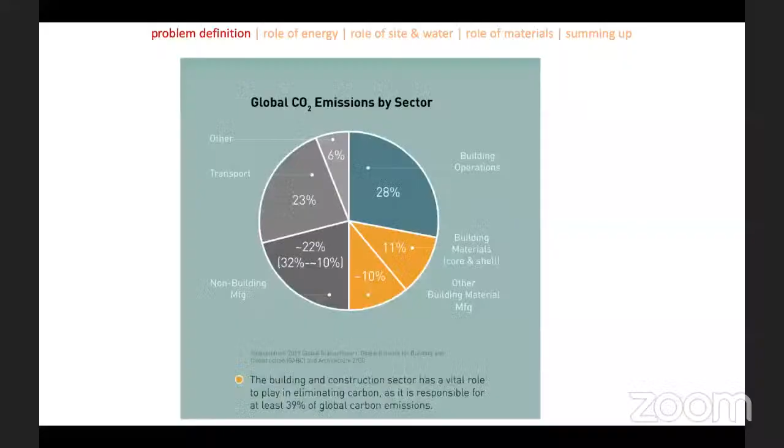Walls, the load-bearing walls, the windows, framing, glazing, and whatnot, plus an additional 10% from the rest of the finishes in the interiors and interior partitions. So all in all, the architecture industry has the opportunity to influence close to 50% of global CO2 emissions. And this is not a small thing. It's a great responsibility and great opportunity.

And if you combine that with the fact that by 2060 we will be doubling the current building stock, between now and 2060 we're going to add one New York City to the planet every 34 days, which is huge. So if you don't apply these climate responsive principles, it would be a big wasted opportunity, and the damage to the environment might be irreversible.

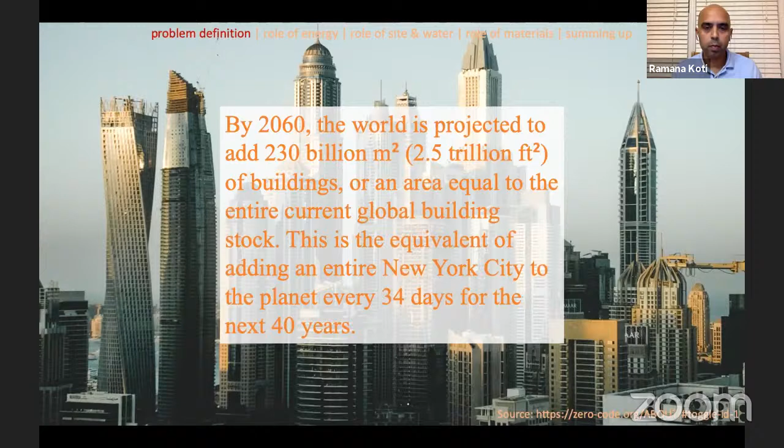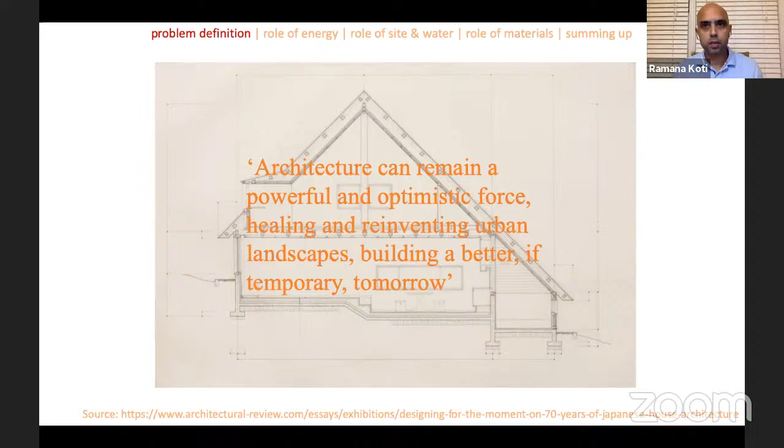Japan, which is regularly subject to earthquakes, extreme weather events, wars and whatnot, has already used architecture as a powerful force for healing and reinventing urban landscapes and building a better tomorrow. So there's something we can learn from what Japan is already doing.

Architecture is important, but it's one of many things. Design goes along with policy and culture, so any change has to address these three issues. Within design, there's efficiency, resilience, and this new term called decarbonization—eliminating the role of greenhouse gases completely from the built environment. We have to do a few things in the short term and a few things in the long term, to address resilience but also build a long-term strategy to avoid emission impacts.

So to sum it all up, in terms of the problem definition, if you take these three parameters—human activity, climate change, and the built environment—all three are related to each other. And the way we live today and practice architecture in general, this relationship is mostly broken, if not completely. The good news is we can do something to fix it, and architecture has a big role to play in fixing it.

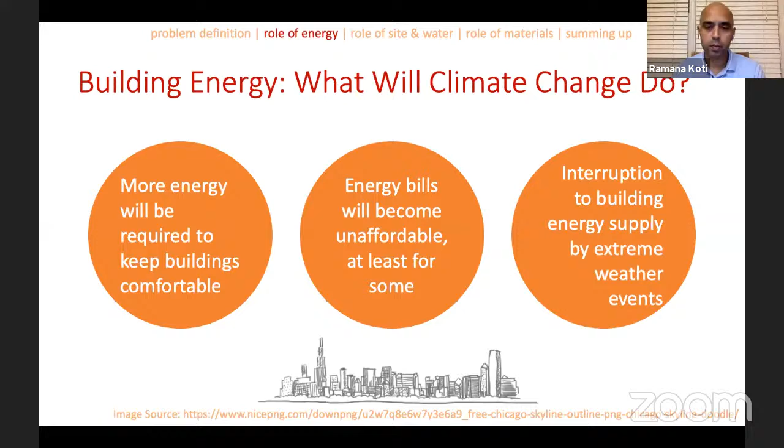So how can buildings respond? Whether the climate is changing or not, I think intelligent use of resources prescribes these three steps in order. First, you maximize passive strategies, as Mr. Vice Chancellor has already alluded to. You focus on the orientation, the passive solar aspect, how the sun comes in or is blocked, how you use daylighting and natural ventilation.

Once you've exhausted all the passive strategies, you employ energy efficient technologies to treat the building—insulating the building envelope, using all LED lighting, or using high efficiency heat pumps, or even ground source heat pumps. So after passive strategies, it's energy efficient technologies, and whatever load remains after the two, you can meet with on-site photovoltaics or solar hot water, and off-site renewable energy.

If you can't meet all of the remaining requirements through renewable energy, you can do whatever you can to reduce the fossil fuel consumption of the buildings. There's a mention of off-site renewable energy here, because in dense urban settings, buildings may not have the site area or roof area to put solar panels on. So while a building's energy consumption might be high, its ability to generate its own energy is not so good in dense urban settings, and buildings might be shadowed by neighboring buildings. So you can always get your energy from off-site renewable sources. There are ways of doing this that would probably take a session on its own, but it's becoming increasingly important.

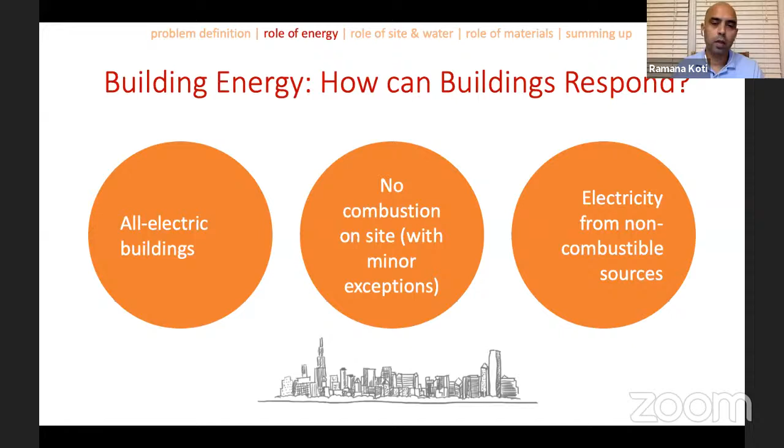This trend has started more recently, and it applies to Western countries more than India. Increasingly there's talk of all-electric buildings, because if you have combustion in buildings, you have emissions. You cannot completely avoid combustion, but you can mostly convert buildings to all-electric. Once a building becomes all-electric, it's easy to supply its electricity from on-site renewable energy, or if the utility plant converts to entirely solar and battery based, then all the emissions from your buildings are eliminated. I know especially in India there's a lot of dependence on cooking with natural gas or compressed natural gas, and certain other fuel types, but this is the new trend.

Beyond all-electric buildings, I'd like to draw on this resource to look at different strategies for how buildings can respond to a changing climate. This book is called Project Drawdown, written by an environmentalist named Paul Hawken.

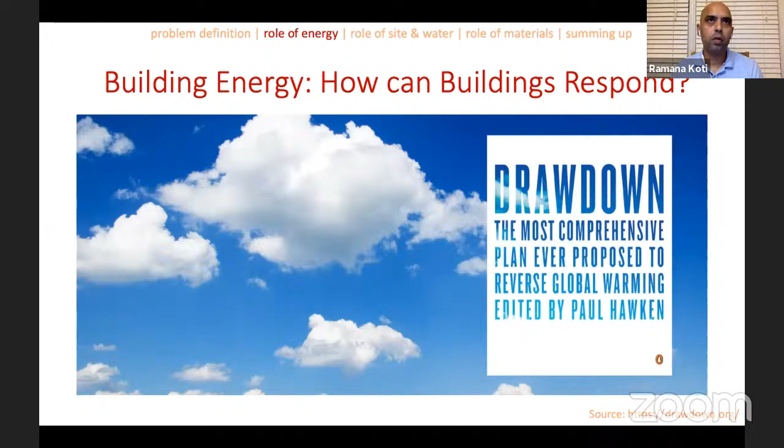What he argues is that we are already experiencing climate change, and terms like fighting climate change or combating climate change are not the right terms or right approaches to use, because it's already here. So he calls for a drawdown, which is a complete scaling down of how we do things to bring the climate back in order.

Let's look at what kind of strategies he advocates in terms of building energy. Please apply this information to your own context—it may or may not be suitable to all places in the world. Net zero buildings is one of the strategies. Net zero buildings means that, on an annual basis, they produce as much energy as they consume, at the very least. So net zero energy may or may not necessarily mean net zero carbon—there are subtleties in there. Please study the differences.

The next thing I'd like to focus on is alternative refrigerants. Most refrigerants used in air conditioning these days are fluorinated refrigerants—HCFC, HFC. All of them are potent greenhouse gases, and they tend to leak from air conditioning systems and refrigerators. So there are two aspects to the refrigerant issue: one, reduce the leakage, and two, use non-fluorinated refrigerants so that even whatever leakage happens doesn't impact the climate too badly.

District heating—this concept has existed for a long time, especially on university and college campuses, where there's a centralized plant that produces heating and cooling, or chilled water, hot water, or steam for all the buildings on campus. It's much more efficient in terms of energy usage compared to each building having its own HVAC system. But it doesn't have to be limited to university campuses—even housing complexes or other community-based situations can utilize district heating or cooling.

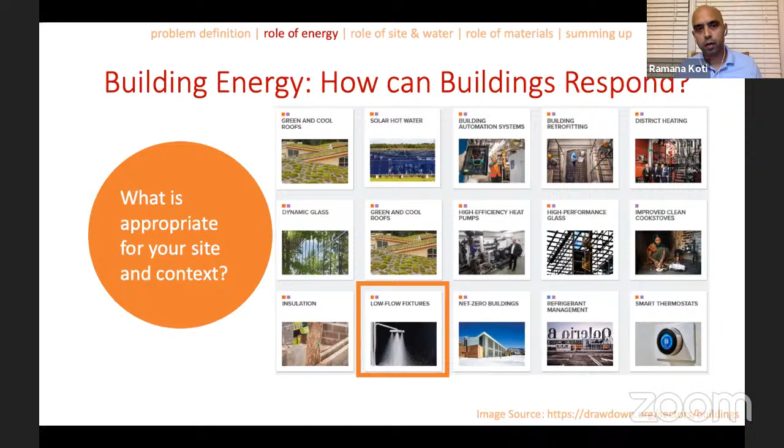I would like to break here before moving on from energy to water, to see if there are any questions.

Hema, can you hear me? Yeah, Ramana, yes, I have a question actually.

The way the whole presentation has been till now, you've touched upon so many points about architectural intervention. So do you have a stepwise blueprint of actually taking any building through this process, like a strategy for how you should check the whole building, something like that?

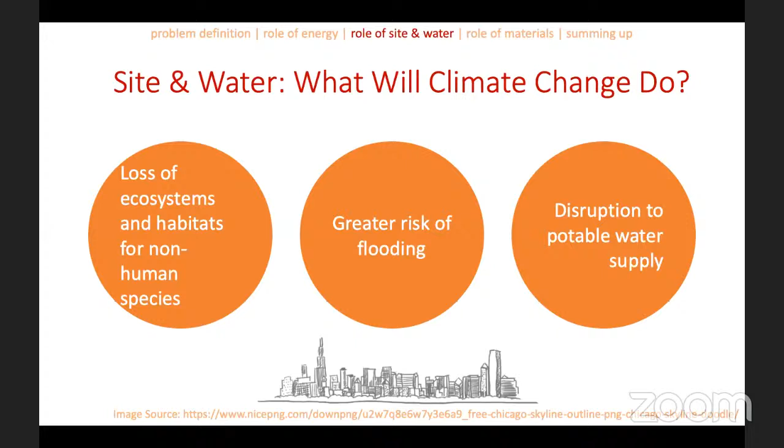So what will climate change do to the site and water situation of buildings? It causes loss of ecosystems and habitats for non-human species because of extreme weather not being conducive to big forests, or man-made deforestation. And because of sea level rise and increased extreme weather events, there's a greater risk of flooding to buildings and sites. All these events can cause disruption of potable water supply to buildings, which our buildings depend on for drinking and a plethora of other end uses.

So how can buildings respond to this possibility? Basically you design - Professor Mohan will touch on this tomorrow in greater detail - but in a nutshell, the idea is to design the landscaping around the building just like you would in a pre-development situation. Bring it back to the natural situation as much as you can, so that you're creating new ecosystems or restoring old ones and creating habitats for non-human life forms.

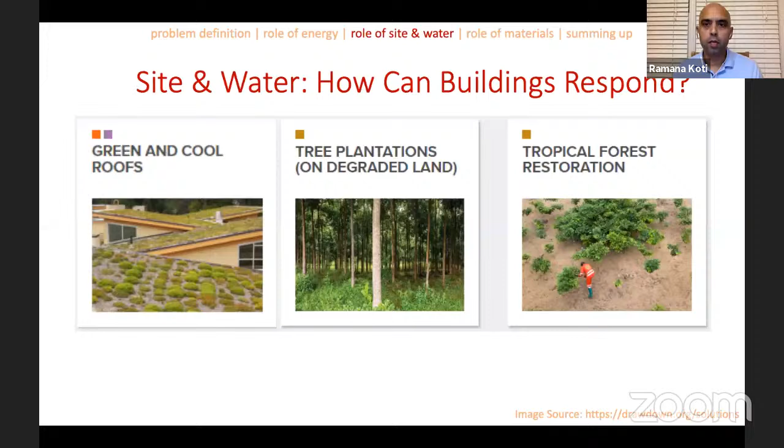And talking about flooding, there are emerging ways of dealing with it, especially for buildings in high risk flooding areas. One is wet flood proofing, where you deliberately create a non-living space at the highest risk area at the bottom, designed so flood waters can pass through the building without affecting it negatively. Dry flood proofing, on the other hand, completely sheds water - it does not let water enter risky areas of the site or building through waterproofing or other design strategies.

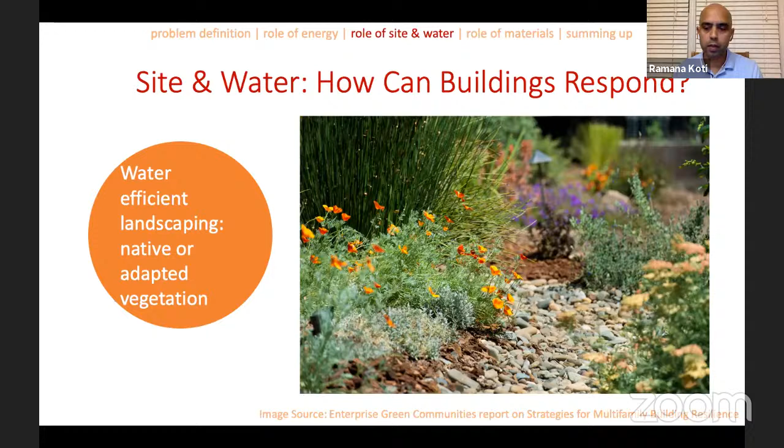Water efficient landscaping means designing your landscaping around the building with native or adapted vegetation - there's some water requirement during the formation period, but after that they can survive purely on rainfall in the region. Water efficient plumbing fixtures, in the US called WaterSense labeled fixtures, are increasingly consuming less and less water. They still need water to operate, but they've become very efficient.

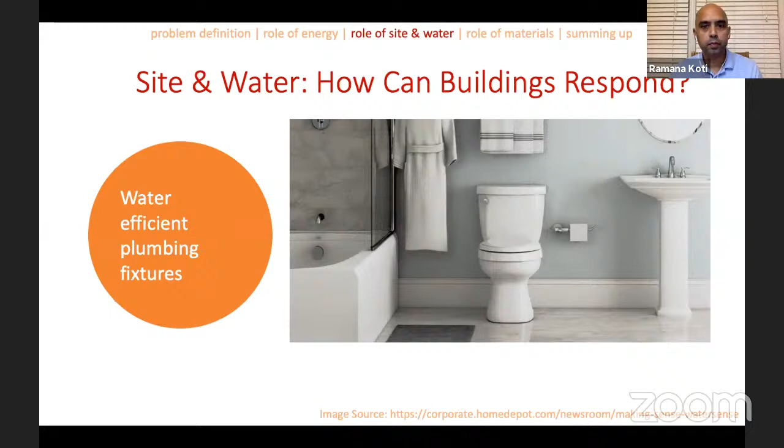Gray water and black water recycling is increasing in prominence, especially as water becomes a scarce resource. Gray water is what comes out of your kitchen sinks, bathroom sinks, and bathtubs, whereas black water is what comes out of your toilets. Both can be recycled on-site or off-site and reused in a way that is safe and healthy.

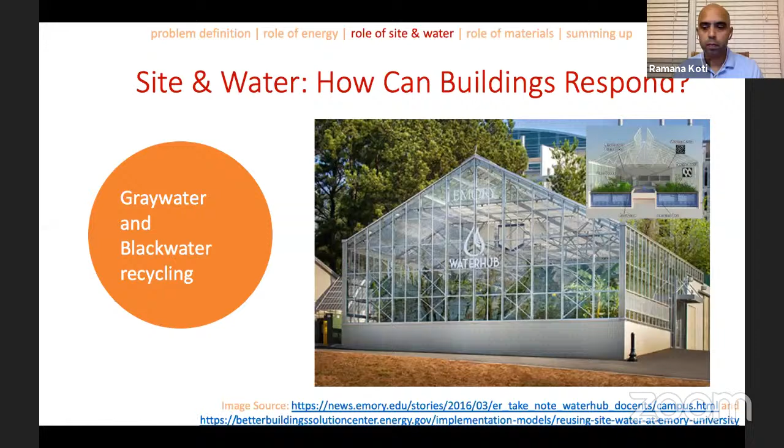Trying to sum up what we discussed so far: if a building's water flow gets interrupted because of an extreme weather event or a breakdown, so your municipal connection gets severed - what we've designed on one project is a day tank, which can hold up to 3 to 5 days of water. This concept is very prevalent in India, but in the US it's somewhat uncommon because the supply of water has not been at risk - the supply is so continuous.

So let's say there's an optional rainwater harvesting connection that goes into the day tank. If the water flow gets interrupted, you can use the water already stored in the day tank to flush your toilets or use very efficient fixtures, and survive until the water connection comes back.

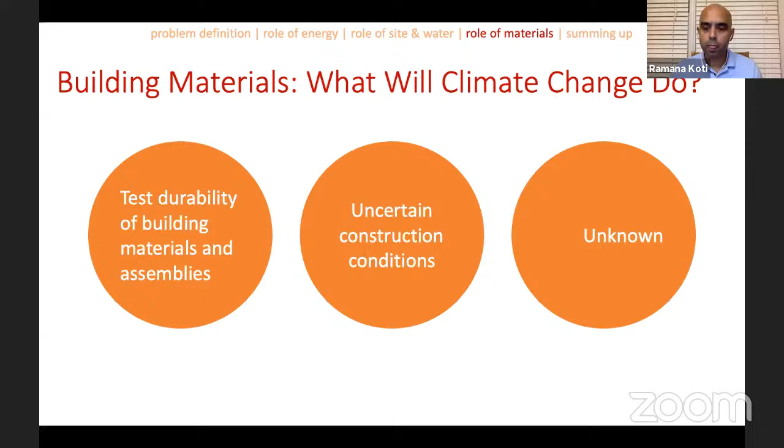So how can architecture and building materials respond to this changing climate? Somebody already asked about embodied energy and carbon - I'm glad you're already looking into it. Basically, the building materials used in a building have an energy and carbon footprint. If you put a time value on emissions, they become more important than energy and carbon from building operations, because you're trying to limit emissions in the next 10 years, going from 1 degree Celsius warming to 1.5. Material-related emissions are upfront, whereas operational emissions happen over the next 50-60 years.

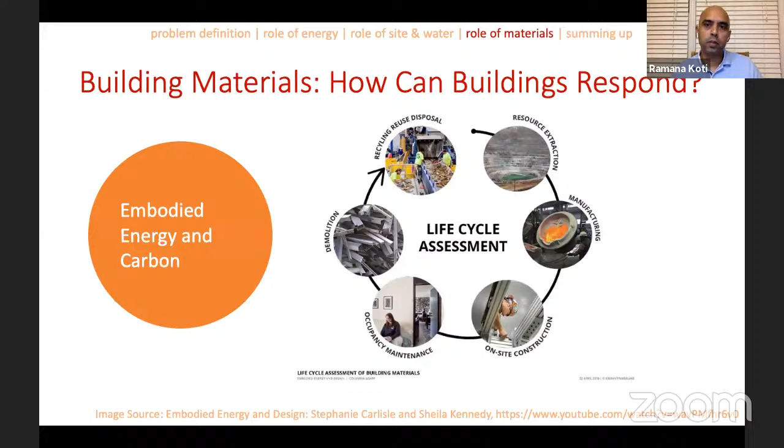That's why how buildings and materials are manufactured, and how clean their energy sources are, becomes very critical. If you look at the diagram on the right, there are several stages in the life cycle of a building material - starting with resource extraction, manufacturing, on-site construction, maintenance, demolition, and eventually how demolished materials might be recycled, reused, or disposed of. Usually it's not a closed loop, because we're not recycling construction or demolition waste enough to put it back in the loop. We're still extracting virgin resources, and it has to become a closed circle for things to be sustainable.

One of the biggest opportunities is adaptive reuse of existing buildings. It may not be the same building type, depending on what a client wants, but you can convert a dormitory building into a classroom building, or a classroom building into a dormitory, depending on how the needs on a campus are changing. Many architects feel we should stop building new buildings and instead renovate existing ones to meet future space needs.

Designing for durability matters too. If a building lasts 100 years instead of 50, you automatically reduce the need for a new building and the emissions that would have caused, given its demand for new materials.

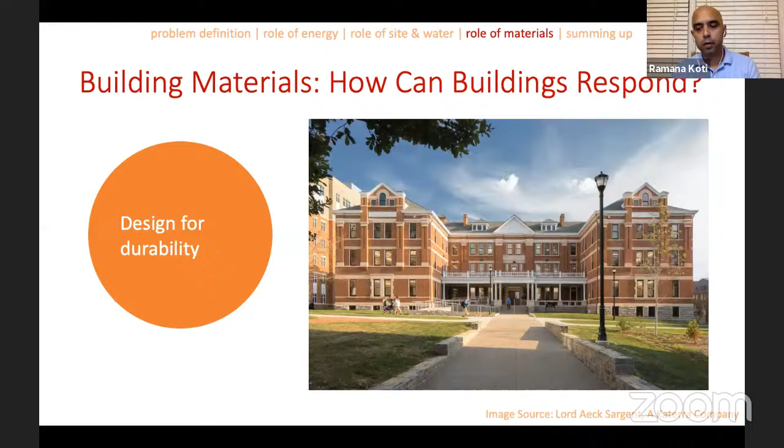If you understand what materials are readily available locally in your region and specify them regularly on your projects, there are fewer emissions related to transporting materials from where they're extracted and manufactured to the project site.

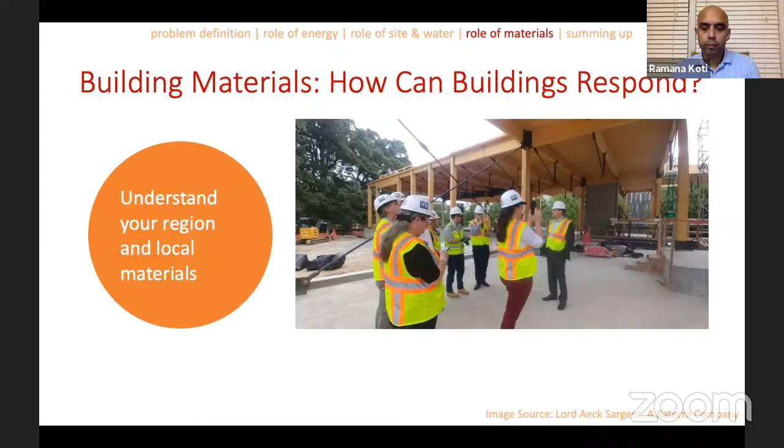Specifying materials with a low carbon footprint is important. Some materials are rapidly renewable or take much less energy to manufacture than others. Keep an eye on specifying materials that naturally have a lower carbon footprint—or that originally had a high footprint, but whose manufacturer has converted to renewable energy for their plant, making it effectively low carbon. Specifying those regularly helps.

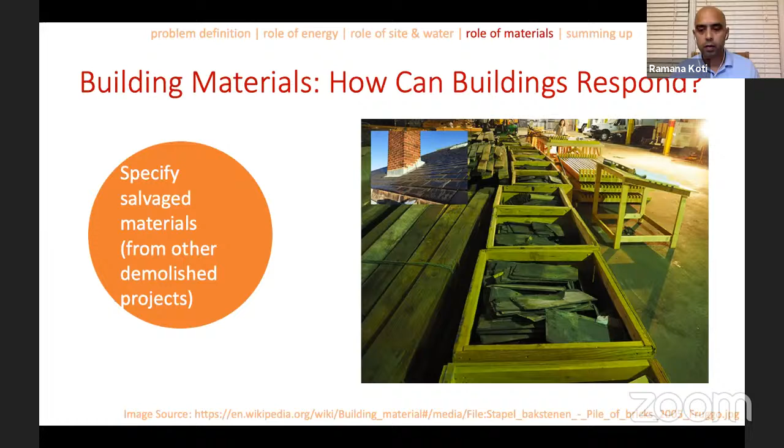There's a process called lifecycle assessment, which looks at the different stages of a building product. There's the product stage, called cradle to gate, covering extraction, transportation, and manufacturing. Then the construction process also has its own energy and carbon footprint, which can be optimized.

Then there's the use stage, where the building has been constructed and is being maintained, and each piece of equipment in the building has its own lifespan. For example, light fixtures might last 10 years, and air conditioning might last 15 to 20 years. If the building itself lasts 100 years, you're regularly replacing those systems inside it.

And at the end of life, what happens? We talked about demolition, recycling, or reuse. You can use this process of lifecycle assessment to optimize the embodied carbon footprint of your entire project.

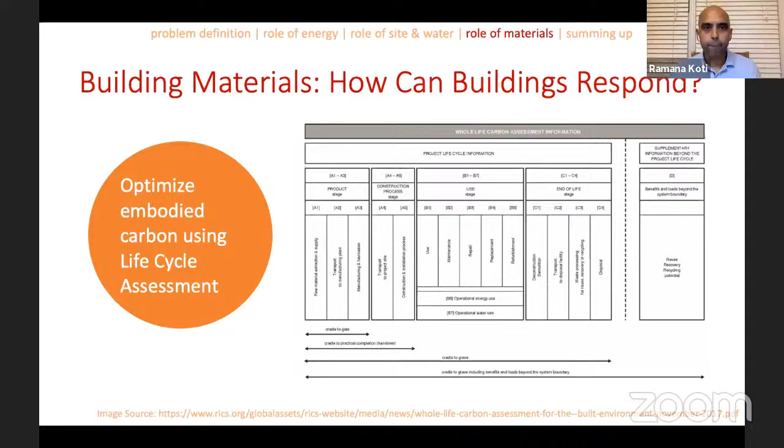Summing up what we've discussed about materials so far: product selection is involved regardless of whether you're building new or reusing an existing building, and the goal is to optimize embodied carbon.

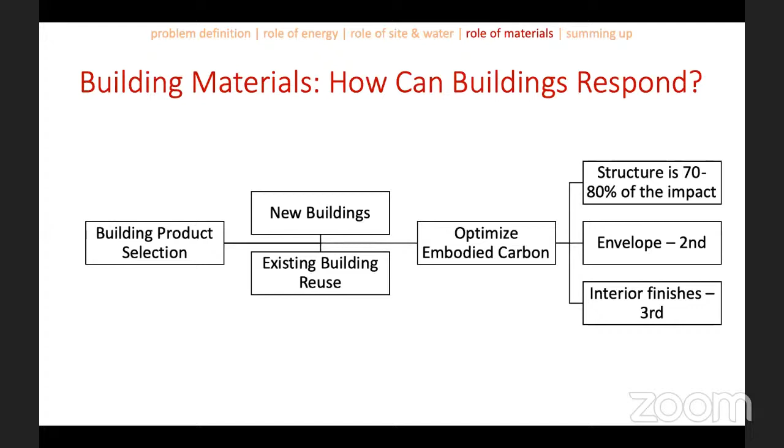When optimizing embodied carbon, if you can only do one thing given the fee and time available, focus on the structure of the building, because the structure accounts for 70 to 80% of the carbon footprint of the entire project. If you can, then move on to the envelope—load-bearing walls, external walls, window framing and glazing. Someone asked a question about glazing. Interior finishes and partitions have only a 20% to 30% impact, so if you focus on the structure, you'll get more bang for your buck compared to everything else.

All right. The next section is summing up, but I want to pause here to see if there are any questions.

There's a question by Ms. Harini. She's saying that glazing and concrete has become inevitable in high-rise construction. Can you suggest vernacular and traditional building materials, particularly for high-rise development in the Indian context, and how far is it workable? I think the case study I'm going to cover next touches on that, but it's not in an Indian context. Please take that information and see if it's translatable to India, or if there's comparable information available for the Indian context.

There's another question by Ms. Shobha, asking for old buildings, how far is it possible to retain and use natural sustainable strategies for reusing the existing material. So it's about reusing old buildings that may or may not be in good condition. Is that the question? I'm not very sure. Shobha, are you here? You can unmute and ask the question. Hello, yes ma'am, good morning ma'am. Yes, you can ask your question.

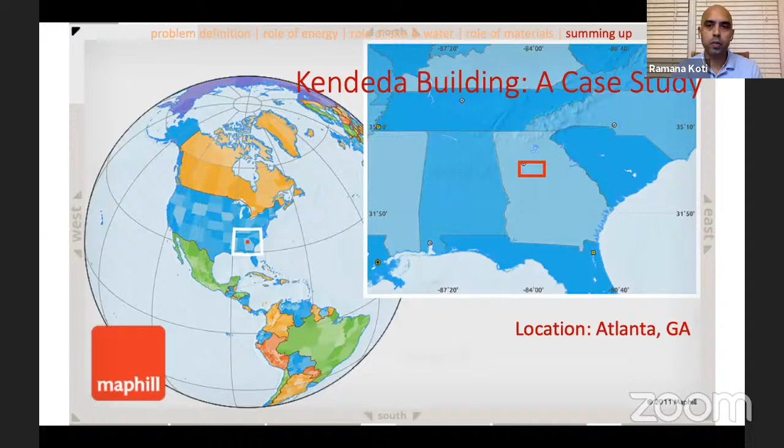So what it does is it uses a certification system called Living Building Challenge. Living Building Challenge is a philosophy. It's a certification system, it's an advocacy tool. But if you take LEED or EDGE and make it 100 times more stringent or rigorous, you will get Living Building Challenge. It has 7.

It follows the model of a flower, because a flower is so self-reliant. And the 7 categories in the certification system are called petals: place, water, energy, health and happiness, materials, equity, and beauty.

In certification systems like LEED and EDGE, you have some things you have to do, and some things that are optional, and you get points for doing the optional things. The greater the number of points you earn, the higher your certification level is, like silver, gold, or platinum. But here, you have to do everything. Nothing is optional. Under the 7 petals combined, there are 20 imperatives. These imperatives are comparable to credits under LEED, and you have to achieve all of them.

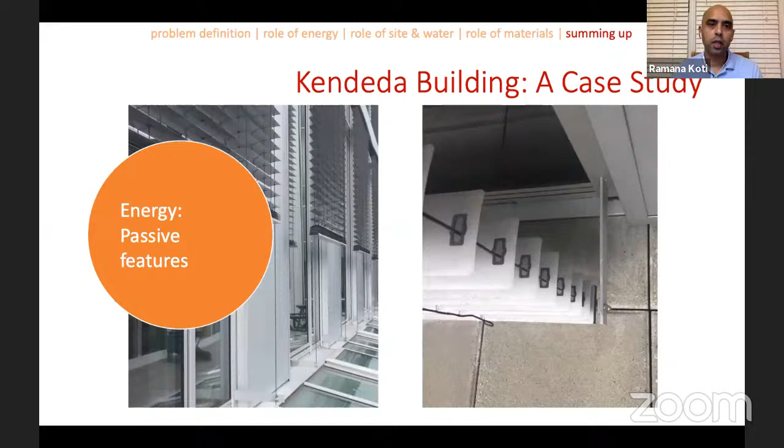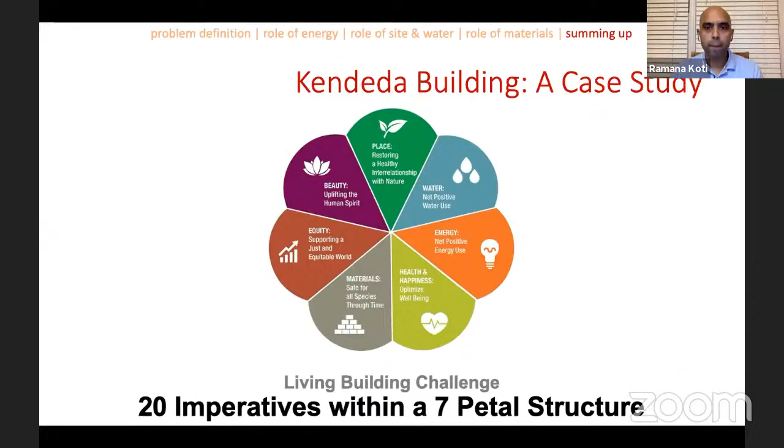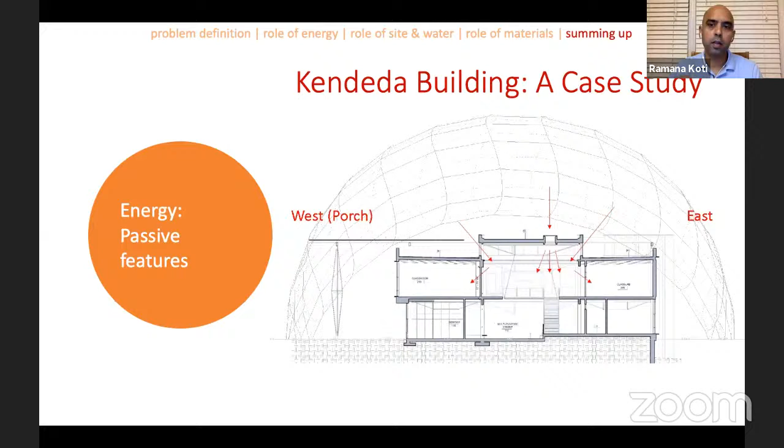On top of the east and west treatments, there are skylights and clerestory windows in the middle, which bring in daylight. I believe there are about 70 ceiling fans in the entire building, and they redistribute the air conditioning and decrease the need for it in a way. They provide passive comfort, which helps reduce the load when power is available. But if there's a loss of power and the air conditioning doesn't perform, the fans by themselves, in combination with the shading and operable windows, can provide comfort.

This was a very initial energy analysis conducted on the project, done even when we were interviewing for it, before we'd won the project. The leftmost bar is the baseline of all existing comparable buildings. The energy use intensity, measured in kilobTUs per square foot per year, of all existing comparable building stock was 83.

If you designed a new building that barely met the energy code of the region, your energy use intensity would be 51. But what if, on top of barely meeting the energy code, you used a radiant heating and cooling system, where hot and cold water pipes run through the floor slabs, connected to a ground source heat pump? Your energy use intensity comes down to 19.4.

For those unfamiliar with energy use intensity, it's somewhat comparable to miles per gallon in a car—it tells you how efficient the building is. Instead of a radiant system, if you used a variable air volume system with low pressure drop, connected to the campus central plant instead of a local heat pump, your EUI stays in the same range of 20. Adding photovoltaics that generate 10% more power than needed would put your EUI at 22.4. There are other measures studied too, but you can see what could have been 83 is now at 20—roughly a 75% reduction.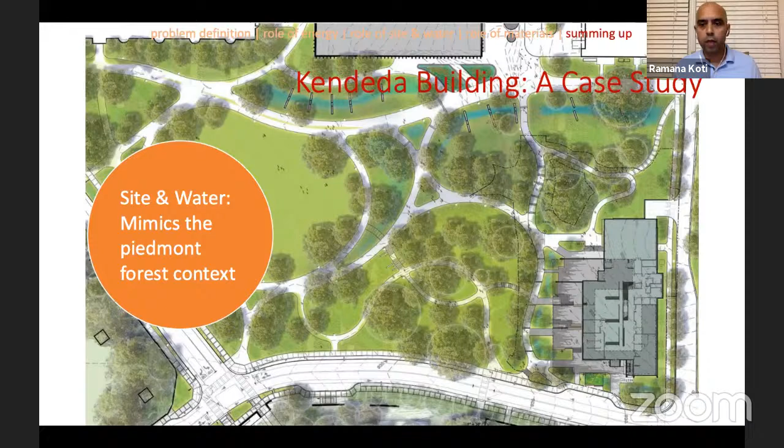There are three scenarios for what happens to water when it rains. In the pre-development period, with no buildings, most water would infiltrate into the ground, with some surface discharge flowing to adjacent regions. But today, the way we design buildings, most water goes into storm drains and the city sewage system, with very little infiltrating naturally as it did in the pre-development scenario.

In a living building, the way we designed this one—which, by the way, has been operational for slightly more than a year now—it's designed to mimic the pre-development situation, where most water gets infiltrated, some is discharged on the surface, but a lot of it is used to create a net positive water consumption situation, as shown in the diagram.

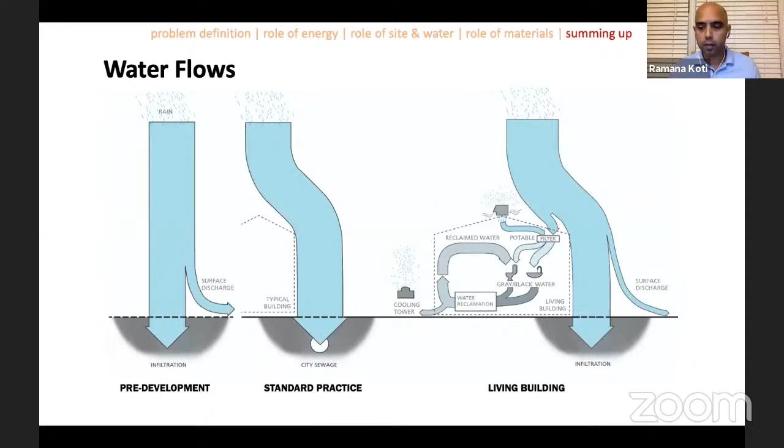And this is another view, plan view of the site that shows the different kinds of water flow on the site and the different kinds of pavement systems that exist. There are other diagrams that explain this better, so I'm going to move from here.

And if you cut a section, for example, the porch area, this pervious unit pavers with the stone base let the water infiltrate and not flow away like a typical concrete surface. And between that and the walkway, there's all these.

One of the requirements of Living Building Challenge is a certain percentage of your site has to be for urban agriculture, and you have to produce food for human or non-human consumption. So these food types were identified as being native and useful to the local life forms, and they were interspersed between pervious concrete and unit pavers and whatnot, and integrated into the landscape of the project.

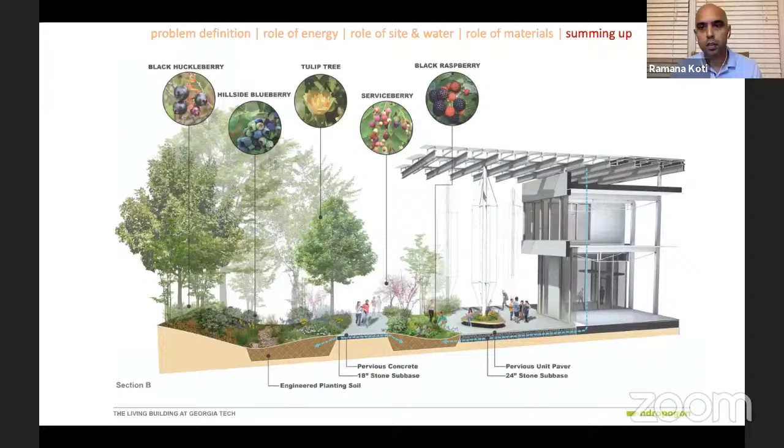So here's another diagram showing different water systems on the site. There's a lot of detail. Don't try to read all of it.

But this gray water treatment we talked about, which comes from sinks and bathtubs and whatnot. And there's rainwater to potable water. Remember, even the drinking water comes from rainwater on this project. And this condensate harvesting—air conditioning systems, when they remove moisture out of the air to cool it, that water condenses, and it's a very pure form of water, which still requires a little bit of treatment, but you can create water through recovering condensate on the project.

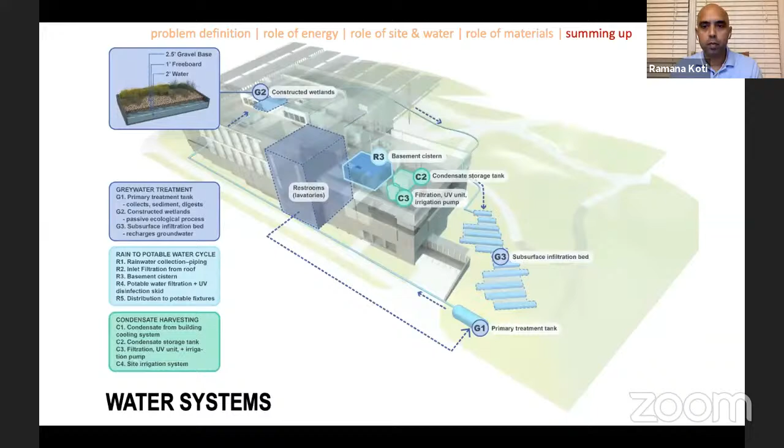And here's another diagram that shows different types of surfaces. On the top left, you will see a green roof surface, and to the top right, you will see the solar panels, which not only double as surfaces capturing rainwater and funneling them down into the building or on site. And the blue areas on the site are porous unit pavement, like we talked about at the porch. And at the walkways, the gray areas are the porous concrete pavement.

And another level of diagram shows what's happening with the water on site. All the blue boxes that you see on site is where the water is stored, either to reuse or to infiltrate—I mean, slow down the flow of rainwater from the site. It's stored here.

Pardon me? Okay, and did somebody say something? No, I think you can continue.

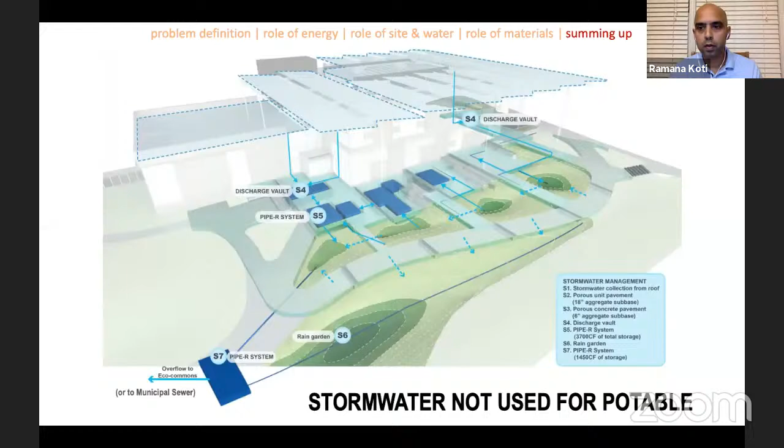Okay, so you store it and gradually release it on the site to improve infiltration, as opposed to all the water flowing away from the site. And all the green areas are the landscaping or bioswales or natural rain garden systems that will actually hold the water and infiltrate it. And we've already talked about the porous pavement systems on the site.

So that was site, but what happens inside the building? Let's take a snapshot of one scenario here.

On the right, everything is the same, efficient fixtures, but your toilets are regular toilets that need to be flushed. And on the left, you replace the regular toilets with composting toilets, which use like a tablespoon of water and soap per flush. So the size of the pies is indicative of the amount of water that the project is using. So just for toilet usage, what would have been 800,000 gallons?

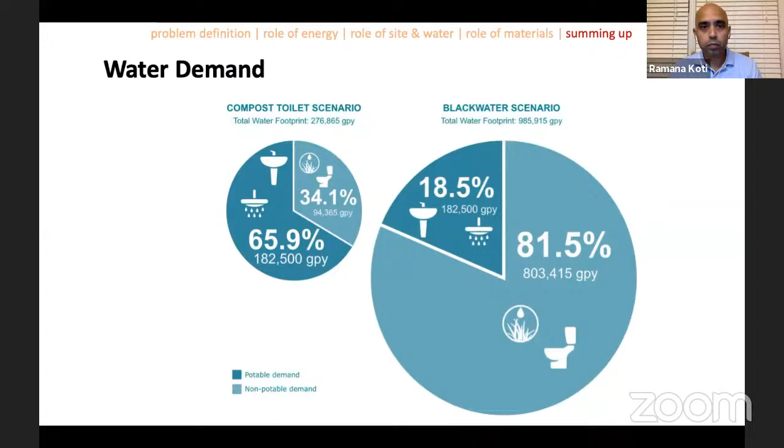1 gallon is roughly 4 liters. So what would have been 8 lakh gallons has been reduced to less than 1 lakh gallons for toilet usage. And this is also a money saver, over the life of the project, because you're not using all that water.

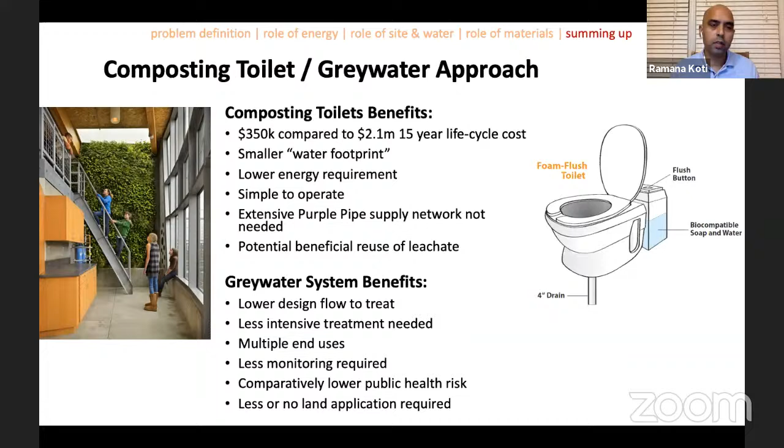And there's, like we discussed earlier, gray water treatment on site using natural systems. And the treated, captured condensate and the treated gray water are reused for irrigation and whatnot, and there's no flushing on the project. But the drinking water mainly comes from the treated rainwater. There's about a 50,000 gallon room in the basement, which is a cistern that holds all the rainwater, which gets treated and circulated for drinking water purposes.

I think I missed a slide here. Maybe it's better to skip it at this point. But we've talked about energy and water.

Moving on to materials. There's about 20 or so red listed materials that are to be avoided completely on a living building. For example, formaldehyde is one of them, and PVC. No PVC piping or any material or product using PVC on the project at all. So those 20 chemicals, if you take all their variations into account, become 700-some chemicals.

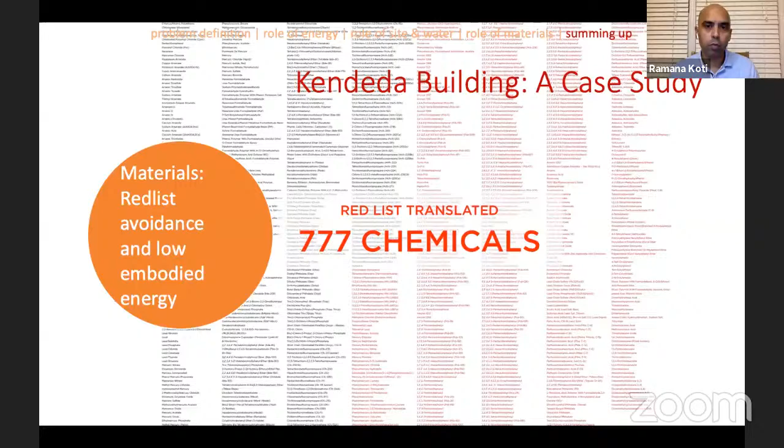And we went through a detailed process to make sure we researched all the products available in the market. Either you avoid the chemical, or if you're forced to use it because there's no alternative available, you have to do advocacy, writing letters to the manufacturers, urging them to remove those chemicals from their products. And for the structural system, like we talked about, structure is about 70 to 80% of the carbon impact on the project.

If you apply carbon footprint analysis to different structural systems, concrete had the highest carbon footprint, followed by steel, the second highest. Wood, which is actually used on this project for structural systems, had a negative carbon footprint because it's less intensive to manufacture compared to cement, concrete, and steel. It also acts like a battery for carbon, storing it over the life of the building, so its carbon footprint is actually negative.

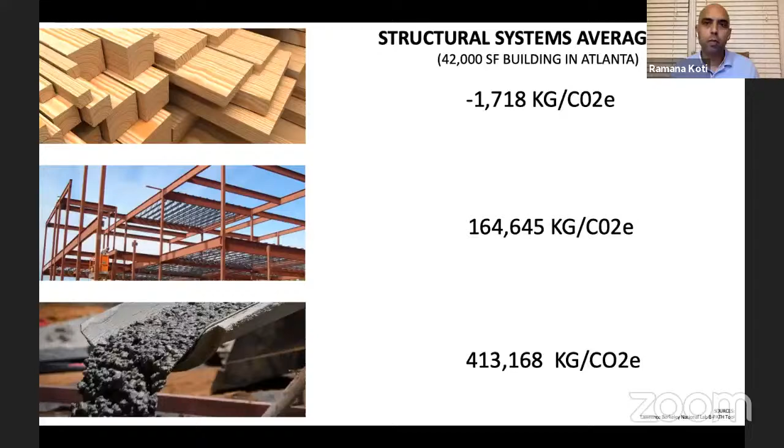So for this reason, timber was the chosen medium of structure for the project.

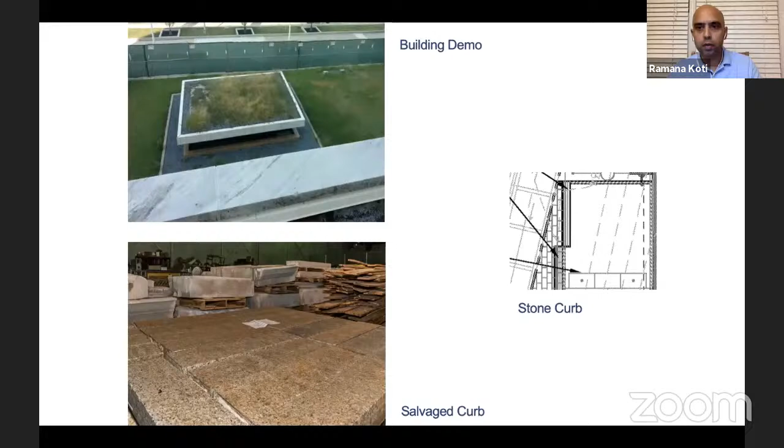On the campus, some trees fell due to storm conditions, and those trees were cut up and converted into countertops for this project.

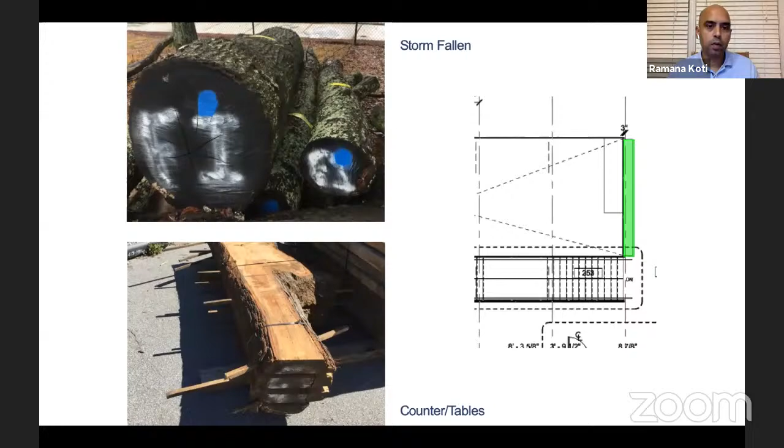On the left, you see that because of tax rebates Georgia offered for the movie industry, Atlanta has become a huge movie shooting hub. All the wood used for temporary structures on movie sets is waste, and we took a lot of it and converted it into ceiling roof decks on the project. You can see some deeper members and some shallow members - the deeper ones are structural, but the shallow members are just fillers, and those shallow members come from the reused joists.

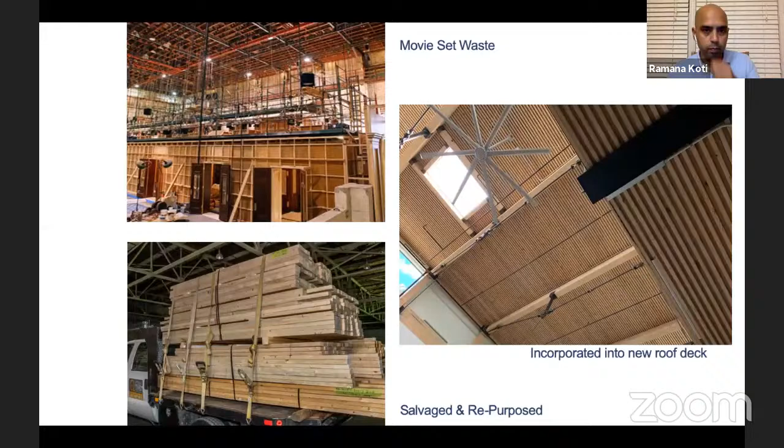Looking at the Living Building Challenge, you have to achieve net positive energy, net positive water, and the building has to be located appropriately in its context. But it forces an integrative process - it says okay, you're doing all that for resources, but you also have to make sure the building is healthy. The materials we already talked about, but the building also has to be equitable to all kinds of people, and it has to be beautiful.

So as you design resource efficient buildings, or teach your students to design them, it's good to keep in mind that you have to combine all these aspects and make sure it's a successful architectural example.

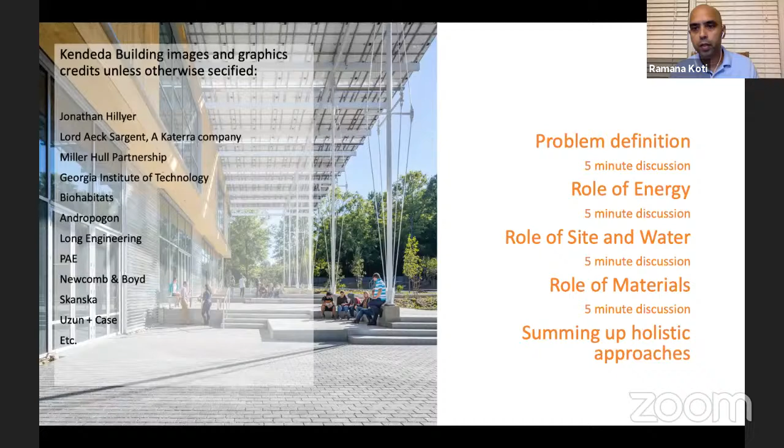Just to quickly recap what we've looked at: problem definition, the role of energy, the role of site and water, the role of materials, and we used a case study to see how all these things come together.

And that's all I had for today. So if you have time for a final Q&A, Hema, I'm open to questions.

Yes, if anyone has any questions, please type in the chat. I saw some questions pop up while I was talking - I don't know if people already typed something or not. They were not specific questions. Okay, okay.

Well, if there are no questions and if something comes up to your mind, Hema has provided an email address to send questions to, which can be answered at a later date. But I really appreciate the opportunity to discuss such an important topic with you all. Thank you.

Yeah Hema, there is one question by architect Tania Bira: wood has a negative footprint, but where wood is not available in plenty... is there more to the question? Yeah, that's all - she wants to understand why wood was used in this particular building when maybe in our case, in India, wood might not have a negative footprint.

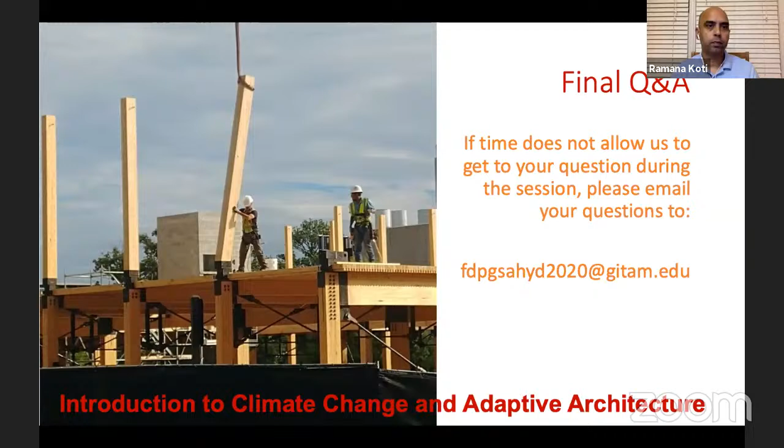I would just like to sum up, Ramana, your work, the presentation that you have done. It was very meticulously done in less than 1.5 hours. You have actually summed up everything about a building as an architect, how we have to look, and the new challenge that you have sorted out in the living building challenge seems more appropriate than LEED and other systems. Whenever we think about LEED and ECBC, we feel they are not being done for a building, but for some commercial gain. Many architects feel these green building systems have commercial end goals rather than an architect actually responding. But this one definitely seems to be a comprehensive and real challenge for an architect.

From net zero, now we are talking about positive net, where buildings are producing more energy than they require, and then they have to be healthy. Now urban forestry is a part of the building itself, where urban farming is part of your building design. All this seems to be a better sustainable solution than the other green building concepts we are working on. This is the first session where you have given a very broad scope for architects to be more attentive, rather than just looking at solutions to problems. Building should not only be a solution to problems, but more than that, which architects should keep in mind while working.

I would like to first give a brief introduction about Dr. Janmejoy Gupta. Dr. Gupta is the head of the department and an associate professor in the School of Planning and Architecture. He is an architect and urban planner who worked for over 15 years in the industry, and was also teaching for a while. He acquired his doctorate in architecture from BIT Mesra, and is presently working on extensive research on passive design strategies for thermal comfort in dwellings and sustainability in urban planning. He's an IGBC professional and has worked on a number of green building documentations. He's an editor for a special issue of the Journal of World Architecture and an editorial board member for several journals, such as the International Journal of Architecture, Arts and Applications, and the International Journal of Sustainable Building Technology. He's also a life member of the Indian Institute of Town Planners and the Indian Institute of Architects. So he's going to give a presentation on vernacular architecture today. We are very happy to have you, sir.

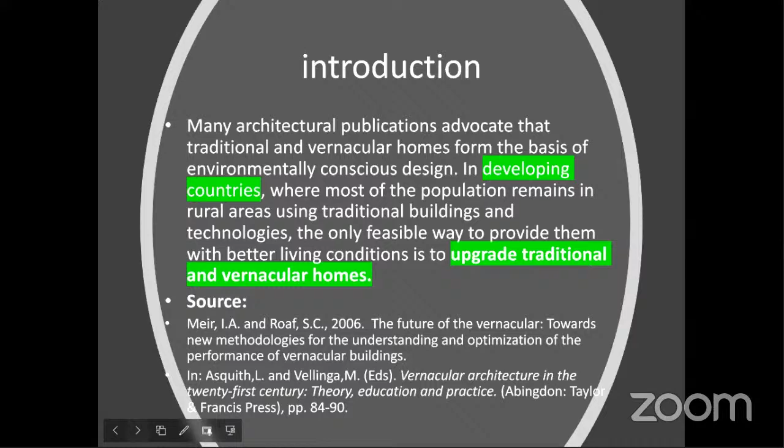Now, of course, most of us would be aware of it, but it still needs to be pointed out that the main determiners of vernacular architecture are climate, yes climate of course number one. Number two is the locally available building materials. Now this is something we are grossly neglecting in present day. I still feel our first choice as architects, even when we are doing live projects, is that we should source the locally available materials. Why?

Even our GRIHA ratings, even our IGBC green ratings, they have this, that you source your materials locally. They have some points for indigenously sourced materials and all those things. So I think that's somewhere we are going wrong on. Third is our indigenous construction techniques. Again, India is very rich in indigenous construction techniques, which can be reinterpreted, which can be re-evolved into modernized techniques, modern ways, and used. But somehow we are missing out.

And of course, fourth, all these four are equally neglected actually in present day Indian scenario, most of the cases I'm talking about, where our local customs and social traditions are neglected. We are not looking into them, we are not giving importance to them. And you know what happens if we neglect the cultural practices of those people, the future generations lose touch with their roots, and that is detrimental to society.

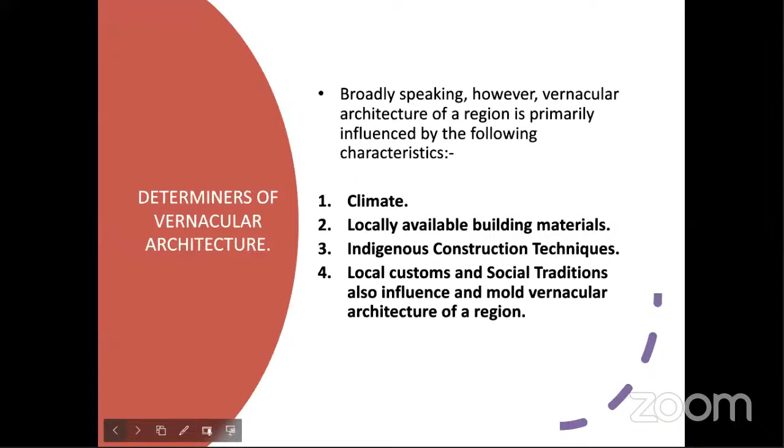Now, vernacular buildings are inherently a sustainable way of life. They inherently promote a sustainable way of life. They are what sustainability is all about. So vernacular buildings are synonymous with sustainability, if we may even say that.

Because all documentations of vernacular buildings through history have shown that these buildings record lifestyles of the past, what people did and how they lived. And as I told you at the beginning, climate change is not something happening only today. It has happened before, with major implications, maybe equally major as today. So then also people found a way to survive and not perish. Therein lies the importance of vernacular architecture. There are a lot of ecological lessons we can learn from vernacular architecture of that time.

Now, many of you must be aware of the famous publication House, Form and Culture by Amos Rapoport, an exceptionally good book on this subject. He has clearly mentioned, after extensive studies, that in vernacular housing, climate and culture are the two most important determinants. Materials, construction and technology are there, but they are at best treated as modifying factors, add-ons. The crux, the heart of vernacular architecture, lies in climate and culture. It is climate and culture that decides vernacular architecture, and that has molded it all through.

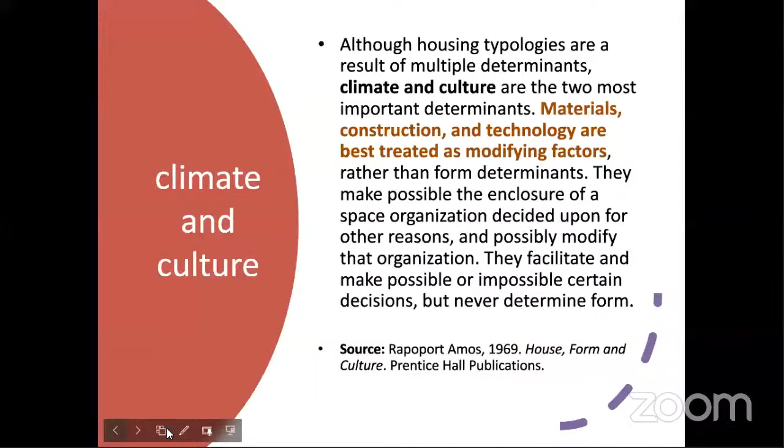Now, the first job we have as an architect is to recognize vernacular values - first, what to take from vernacular architecture and what not to take. We can't blindly go back 50, 100, 200 years. It can't be done in today's high-tech world of intelligent buildings. But there are some things which we need to take. So the first thing is the need for recognizing vernacular values.

Now, some things that vernacular architecture does very well is orientation of buildings. Of course, we also know it, but unfortunately, even after knowing, I can show you dozens of examples in real life architecture where buildings are not even oriented properly. I know there are other factors where architects are not free to orient their building as they wish in many cases, but still, that's the job of an architect, to find the best fit solution. And sometimes we are guilty of not doing that.

Internal arrangement of spaces in a lot of vernacular housing all around the world is exceptional. The use of courtyards is something we need to learn from vernacular architecture - where to use internal courtyards, for example in hot, dry climates, and where to use external courtyards, maybe in climates which are a bit windy and hot but warm and humid, with an appreciable evening breeze. We need to orient those courtyards in the appropriate direction.

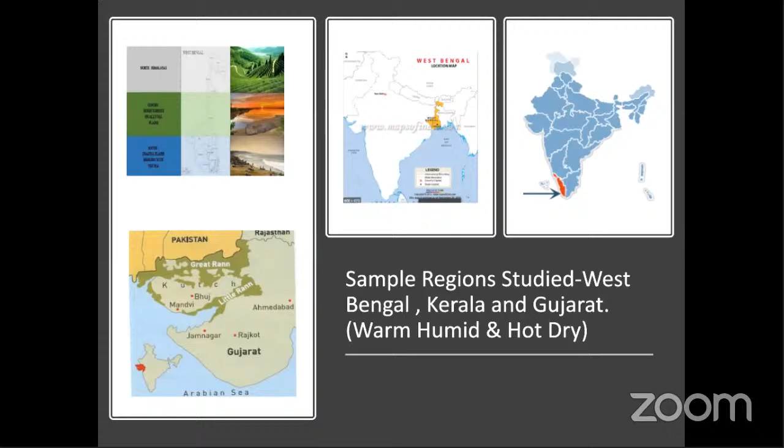This is something I had worked on in one of my research papers, trying to find contextuality in vernacular. The main reason vernacular architecture is being shunned or ignored nowadays is that many people don't find it contextual or at par with their economic status. Even if low income people are earning a lot, they don't feel comfortable or prestigious enough, status-wise, to live in vernacular houses. So we need to find contextuality in vernacular, and for that I made a basic matrix for one of my papers. I am showing you excerpts of that.

First is, of course, climate responsiveness. In order to evaluate any vernacular architecture of any place, be it India or abroad, we need to understand how suited it is to climate. If it's not suited to climate, it's useless to have that vernacular architecture - we can try other solutions.

Number two is aesthetics. Of course aesthetics matters, and a lot of vernacular architecture is studied just because it's so attractive. There are a whole lot of documentations and books written out of the earthly beauty of vernacular architecture.

Third is building materials. We somehow have a misconception that vernacular material is only mud and bamboo. It's of course not, as the previous presenter so nicely put it. Even timber is a big thing, granite too - that's vernacular as well. Anything available in your region, any type of locally available stone, is a vernacular stone. You can find places in Rajasthan and even in the South where certain specific types of stones are available in abundance. If you're using that stone, you're contributing to environmental consciousness, to the greenness of your building, and retaining the local character of that area.

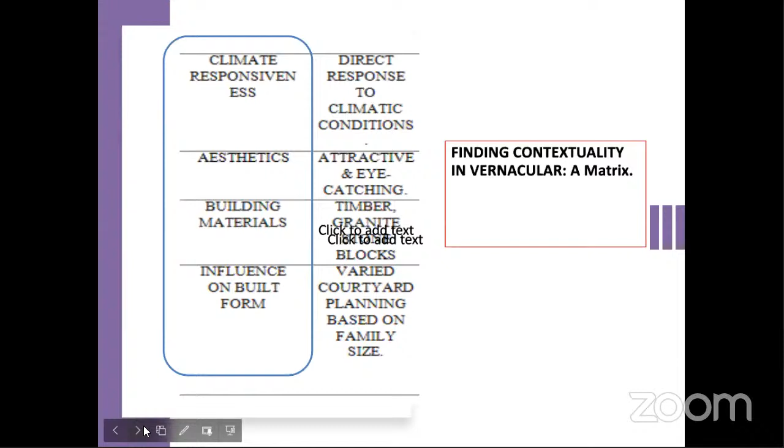And then in Murshidabad and areas in the north of Bengal, they had those curved roof structures, not made of thatch, but they were the Adina mosques. Some of you must be aware of Adina Mosque, Murshidabad, and Hazarduari. So that's when the style started.

And then they built these famous Vishnupur temples devoted to Lord Vishnu at Vishnupur, in Bankura. These were terracotta temples, terracotta being nothing but local soil clay, burnt clay, and it's still standing strong after so many years. It's a heritage site, a very important one, and it's extensively documented.

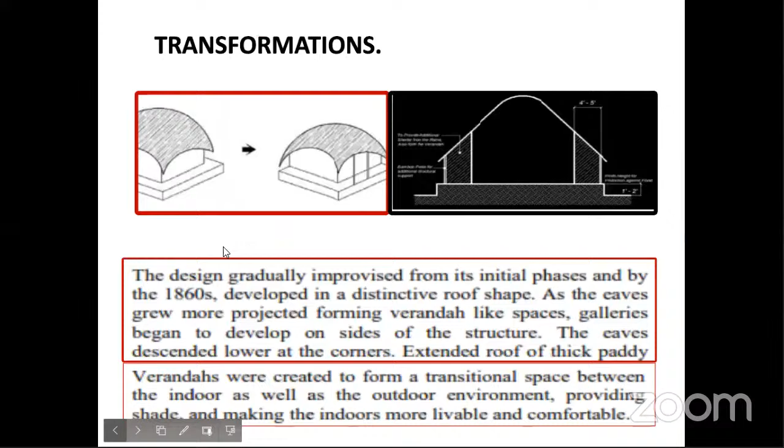Even in the atchala ones, I've seen varieties where they introduced a stack effect - they lifted the upper part above the lower part, creating clerestory window type features for lighting. A number of good houses in Bengal still exist which use this, with top-hung windows that can be opened in good weather to allow cross ventilation and a stack effect.

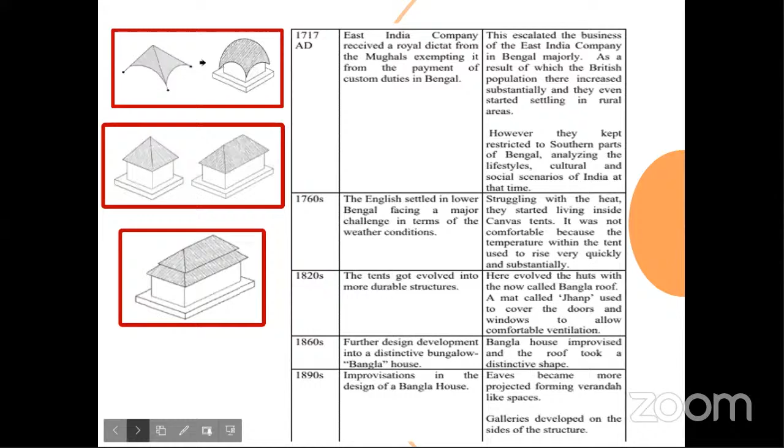So it's all become part of the architectural heritage, and tragically much of it is not recorded properly. That's the difference between what happens in European countries and other advanced countries, maybe American countries, where they are very good at documentation. Our documentation exists, but it's haphazard, scattered, and not very properly done.

So now we will come to materials. Materials in Bengal - unfortunately I somehow missed a slide about the materials of Bengal. So from now we are actually beginning on Kerala, and the materials of Kerala are there.

With respect to the materials that Bengali architecture used, one of them was terracotta, which was extensively used. In the Islamic architecture at Pandua and Gaur, Hazarduari, they used lime extensively as it was a favorite material, along with lime plaster and surkhi. This was the same gharana of architecture, the Deccan Sultanate and Islamic architecture.

It was the Bengal Sultanate, same kind of architecture, and they used a lot of lime plaster. They used clay and burnt clay bricks and terracotta, as they say. In some isolated areas, some stone was used, but not much stone has been used.

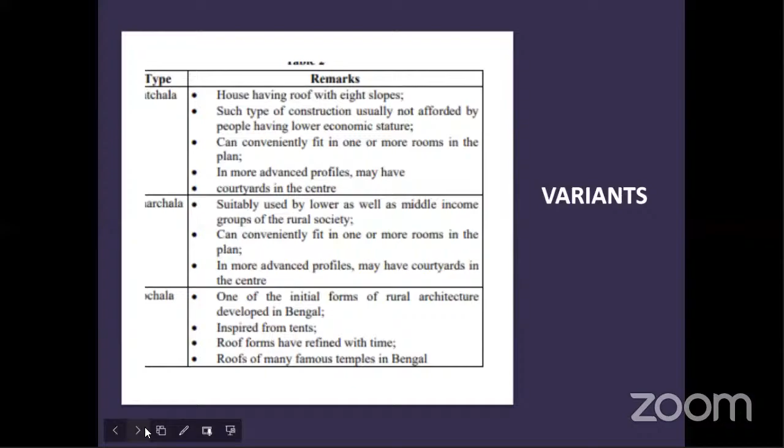So now we move on to Kerala, again a different story. I selected the states in such a way that they offer different perspectives. Kerala was influenced by the British, of course every part of India was, but the influence of British architecture was somehow more in Kolkata, Mumbai, and Chennai, the major metropolises. Kerala had its own romantic architecture developing.

As many of you would be aware, it's about mud, basically laterite, red brick, granite stone blocks, and lime mortar, which was commonly used all over India. Wood made it a much more versatile, varied combination of materials: bamboo, clay roofing tiles, and coconut palm leaves, or palmyra leaves as they are called.

Timber was mostly used as a structural element in Kerala architecture. In terms of indigenous technology, Kerala architecture is one of the most advanced in India. A lot of architects, including Professor Architect Harimohan Pillai, have documented the extensive indigenous construction techniques used in Kerala, particularly in roof construction technology. There are a varied number of local indigenous technologies used through the years in Kerala architecture that can actually be used in modern architecture.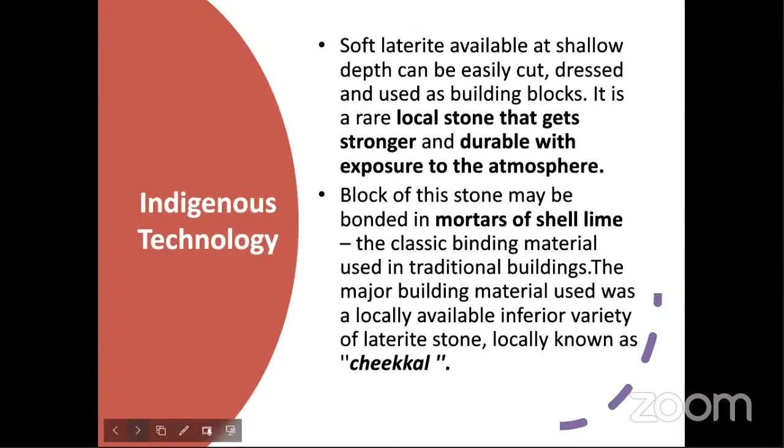I've taken this from Dr. Harimohan Pillai's works, Professor Dr. Harimohan Pillai. You can easily go to his website and see in more detail how meticulously he has identified these roofing typologies, and how these are used to employ things like the stack effect, where hot air rises up and escapes, giving adequate ventilation through these complex, intricate structures, which can easily be replicated in other materials also.

It can be done in any other material. Even bamboo is a very viable material used in a lot of modern conditions, because if you treat it for waterproofing, through treatments like borax treatment, making it insect proof and waterproof, and integrate it with reinforcements, then it is one of the best materials today also.

So hollow bamboo or whatever - all these things are work actually being done with regards to the skillful use of timber and how you carve your woodwork. If you care for the aesthetics part, that's how architectural character is gained, by some uniqueness in your architecture, some unique carving of woodwork, some joinery details, some framework, something which lends that exclusive touch to your indigenous architecture. That is what vernacular is all about.

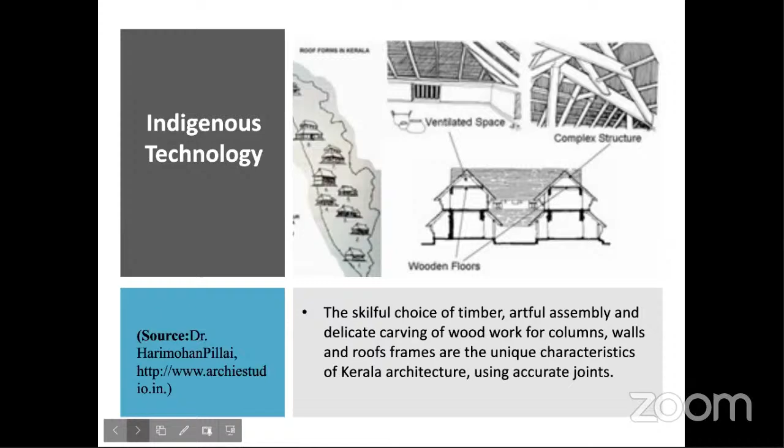Vernacular is equally about indigenous technology as it is about indigenous materials. Surprisingly, Griha ratings and IGBC ratings do not have any points for indigenous technology. They have innovation, under which a wide variety of points come in, and they have points for locally sourced materials, but they don't have individual points for indigenous technology. At least Griha should have. So that is where we have to learn from vernacular techniques.

And climate responsiveness is very high in Kerala architecture. Professor Dili and Naseer and others, and many from NIT Calicut, have done extensive work on how well Kerala architecture exemplifies the stack effect, and how the overhanging eaves are so comfortable. The look of the house tells you that even on the hottest day it will be comfortable. See how nicely they use the courtyard to make hot air rise up and leave, while bringing in fresh air from outside. It's amazing.

And they use shingle roofs, basically based on Mangalore tile shingle roofs, where all the tiles interlock with each other in a unique way. So the shingle roof use and protruding eaves are a very good response to the tropical rain, and of course to the harsh sunlight and harsh rays of the sun. They cut out the glare by having porous walls.

The I-shaped building mass is very good for a warm, humid region because it offers mutual shading, cross ventilation, and ventilation on alternate walls. They have an open plan, which is desirable in a warm, humid climate. We go for closed, inward-looking plans in hot, dry areas or cold areas, but in warm areas, to let the wind in, we need a bit of open plan, though not too much so that it exposes us to too much heat. So these are pointers, things we need to learn from vernacular architecture.

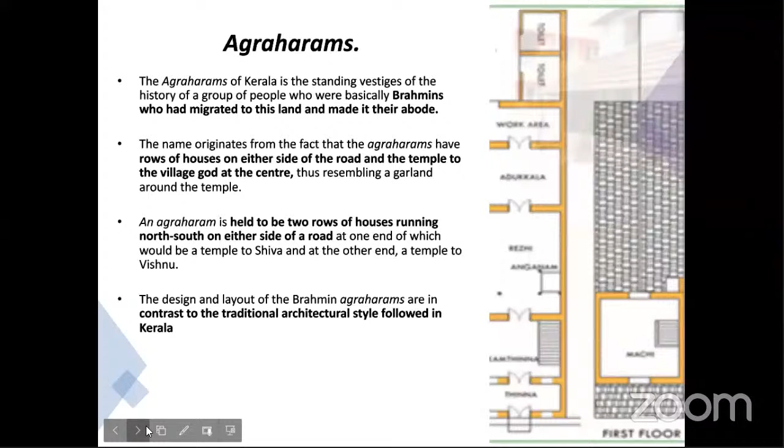In today's context, our definition of socioculture has changed. We are not like our ancestors were 50 or 100 years ago. But today's architects and urban planners can think of existing settlements and remodify them based on plazas and needs, with integrated town development, which has not happened in most cases. There are still new developments yet to happen in India because of our burgeoning and increasing population. We need it, and maybe we can take care of those things in later times.

Now, moving on to a very different part than Bengal and Kerala - Gujarat. These are called Bhungas, which have their own traditional style following the strict fixed rule of hot dry area architecture: building shapes must be as compact as possible. Being in a desert area with economic limitations, they have very little access to materials, so they used wattle and daub, mud, and sun-dried clay blocks, evolving their own unique traditional method of construction, getting very good results. Bhungas have been extensively documented and found to be very comfortable.

See the compact layout, which is closed and inward-looking with a small open space in between, which does not allow hot desert winds to come inside. So it's adaptive to the climate, and also adaptive to community living.

In those harsh conditions, they have to depend on each other. The women folk can sit together in the afternoon after their work is done and discuss about the day, discuss about life and its challenges.

This is a unique piece of architecture, and they have their own particular construction methodology, particularly of roof construction. So Kerala had its own style, Bhungas have their own style.

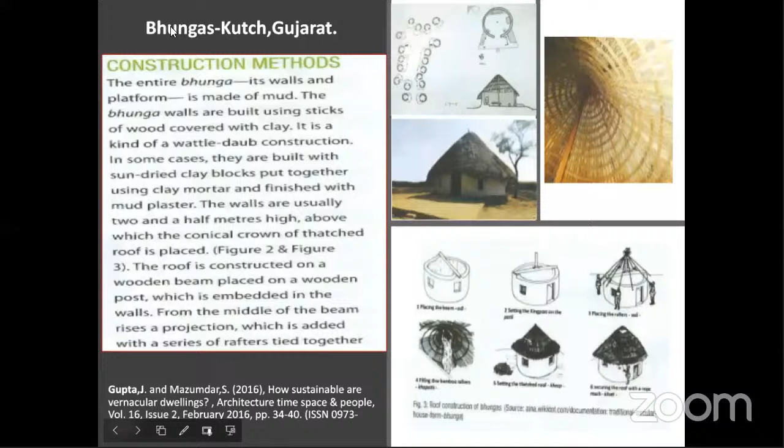I had done research on this and compared these things with modern day green building standards, with respect to site planning, energy performance, material use, recycling, and environmental quality. It was found that in most of these parameters, the Bhungas were performing very well.

For example, with respect to site planning, we are preserving and protecting the landscape during construction, reducing site disturbance. All the parameters on which IGBC or Griha award points, we are taking care of them. We are preserving the natural ecology and reducing the entry of hot winds.

Energy performance wise, it's an optimized design, a very compact circular shape. We are exposing the least amount of surface area while allowing maximum volume inside. It's also very earthquake resistant. In an earthquake prone area, that's an advantage. The cylindrical volume is good in that way, and the material itself is good in case of a natural disaster like an earthquake.

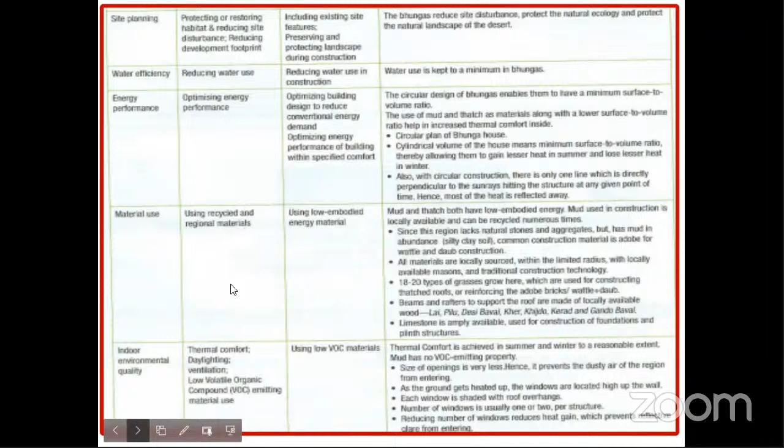Now looking at a global level, Hassan Fathy, of course, New Gourna village, Egypt - he must be a well-known name for most of us. He also worked a lot on revitalizing vernacular architecture of New Gourna village, for about 3,000 families, and it's a globally held example. He won the Aga Khan Award for the same.

So he created opportunities for passive cooling in those vernacular mud dwellings - stack effect, as you can very well see in this drawing, and so aesthetically beautiful as well, making simple buildings into something much more. You had a lot of cross ventilation, and these models can be replicated in other buildings also. That is where vernacular architecture becomes so important, if we treat it well and take the right steps to make things work.

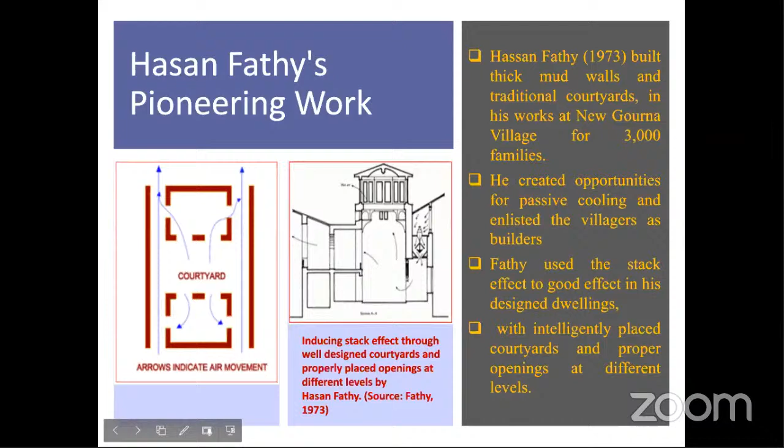So now we come to our lessons. What are the lessons we have learned from our tradition that we can take forward? Now, of course, we know that the traditional way of living was inherently energy conscious, and it has strong linkages to the environmental and climatic context, no doubt about that.

Many of the traditional features are replicated in some modern buildings, but the functional utility of the buildings is somewhere lost when we try to do it. In some cases this has happened, and that's where judiciousness comes into being. Also, what we need to do for the future is one area.

Now, research has to be the backbone of this. We can't just start building. Novices who pass out just 2 years down the line can't be expected to start incorporating vernacularity.

I feel this needs to be supported by some research. Many people say in architecture, research is redundant. No, it is redundant if done in the wrong direction, but if done in the correct direction, I feel it's definitely as important as in other engineering, technical, and science branches, because architecture is also a science, and more so what we are talking about—climate change, adaptive architecture—is building science. So we have to have some research.

And I feel that our traditional materials and techniques can be analyzed in terms of energy consumption in future studies. This is one area of research that I feel is very essential.

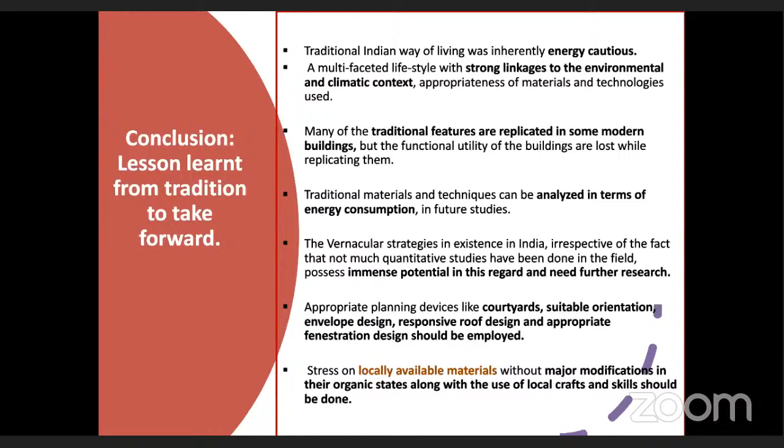I also feel that vernacular strategies that have existed in India are not being studied in detail. Not much quantitative study has been done in that field. And I feel our future—since there is now this rush for PhDs for teaching posts, including in architecture, something that was not there maybe 5-7 years back—we need to take it seriously and maybe turn this into the right direction.

Maybe our research can be guided, maybe our supervisors can guide their students along these lines. Again, appropriate planning devices like courtyards, orientation, etc., should be employed more stringently and properly, and stress on locally available materials without major modification in their organic state should be encouraged, along with the use of local crafts and skills. Somewhere we are also losing our local craft and skill base.

Now reinterpreting some examples I've taken from the work of Professor Harimon Pillai and others, in which we see how we can reinterpret. This is one example of a Kerala modern-day house reinterpreted using vernacular traditions. This is again the traditional timber roof on where my cursor is, and this is the modern interpretation—nicely done, as nicely as possible, and it looks very good also. So it can actually be done.

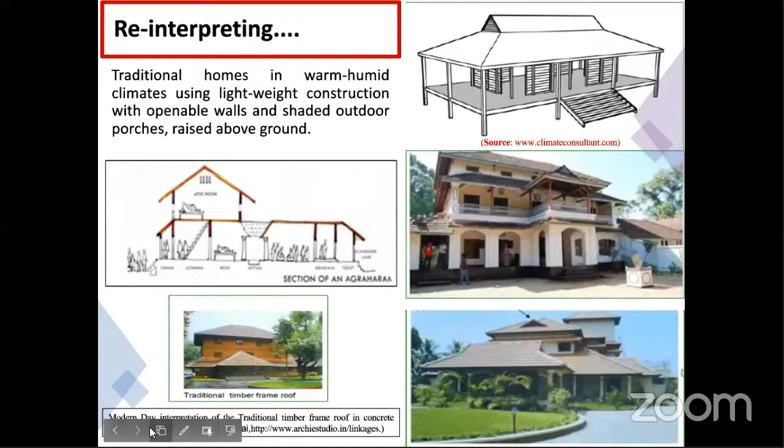Now, these are some other indigenous vernacular techniques worldwide. You'll be surprised to know there are other techniques too, like rammed earth domes, which were actually the basic plan. This one, where the upper part is a Nubian dome - that's the Persian dome and the Nubian dome, used basically in the Middle East. What I'm talking about is the rammed earth dome with buttresses, where the basic outline is a hexagon, and the load transfer is done so nicely using buttresses. So these are indigenous techniques used in different parts of the world.

And again, in Egypt and Persia, you have these type of dwellings with wind catchers, and these are thousands of years old. So these have been used and are existing uniquely - this is a unique construction technology of Nubian domes, which are still being used. If you go through Gernot Minke's Building with Earth, you will get examples of this vernacular architecture practice.

I can tell you that some countries are very much into earth architecture and other vernacular architectures - Germany, Mexico, Spain, parts of USA, Texas, they are doing it. And it's not that only economically weaker sections are living in it; people are living in it out of their own choice. They are going back to nature and enjoying it. So maybe we need to slow down and readapt to these techniques again.

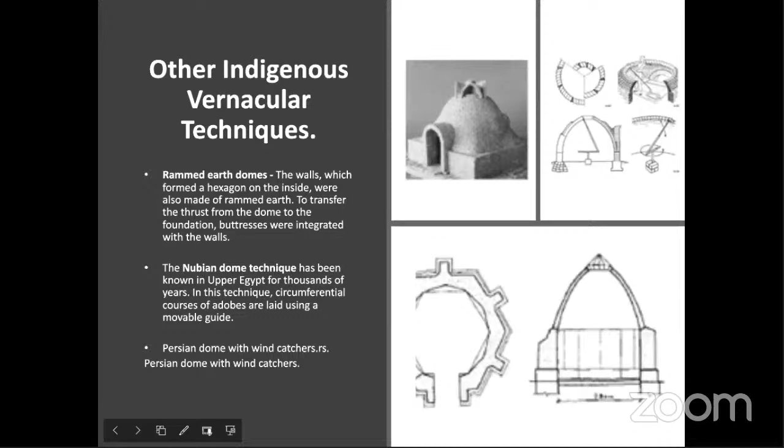And of course, Auroville has very good presses - Tara, Balram press, and all those presses - where you can have specially designed compressed soil blocks, which are a mixture of clay, sand, and fine gravel, under controlled conditions, keeping pressure usually between 60 to 100 kg per centimeter square. We have small steel molds, and these are actually known as green blocks, soil blocks, green bricks - very eco-sensitive, environmentally friendly, and very much in line with adaptive architecture in view of climate change. It leaves a very low carbon footprint and can help us a lot.

And you can stabilize it with the addition of a little bit of lime, and it works much better - it becomes more water resistant, and in areas where it doesn't rain that much, you can use it very easily. Even where there is a water threat, there are ways to counter it further. Though in these type of blocks the water threat is itself countered to a large extent, there are many other ways to counter it even more. These are prepared under controlled conditions, so we are using technology in the best possible way. The only thing is we are not getting into it.

Now, just talking won't help - how do we actually get into it? Maybe there are some things we can do to elaborate on the points I discussed. One is to recreate the thermal properties of traditional materials with modern day industrially produced materials, or maybe materials produced from waste. That's a huge area we can explore. We also need to properly calculate the thermal conductivity, transmittance, and insulation properties in greater detail of bamboo-reinforced rammed earth walls, and document it.